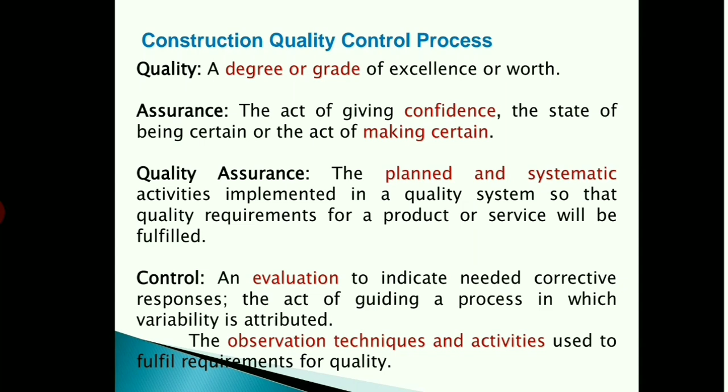Who will be responsible for quality control and who will be responsible for quality assurance? In construction activities, for quality control a contractor is very important. Usually the contractor is responsible for quality control, making sure that the standards are met for production, whatever activities are going on at the construction site.

What about quality assurance? Usually the government or an outside third party is responsible for performing quality assurance. For quality assurance, government or any outside third party is responsible.

In quality assurance, there is spot checking of contract compliance and test results, ultimately making sure the quality control process is working or not. So, quality control - contractor is responsible. Quality assurance - government or third party involved in the construction activities is responsible.

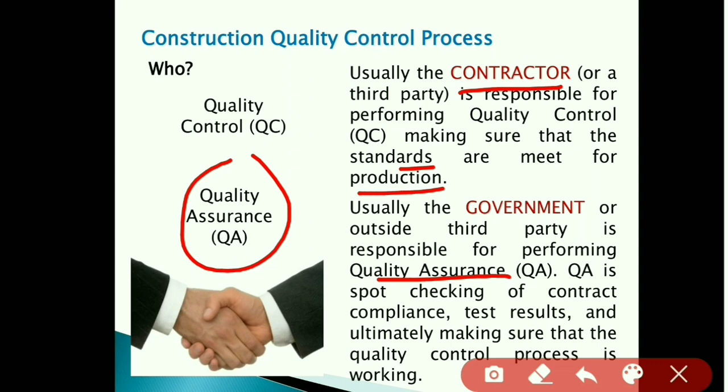How to achieve quality assurance? Government organizations or clients like BSB, MOWHS, these government organizations or any executing agencies will have very clear guidance on what is required per contract.

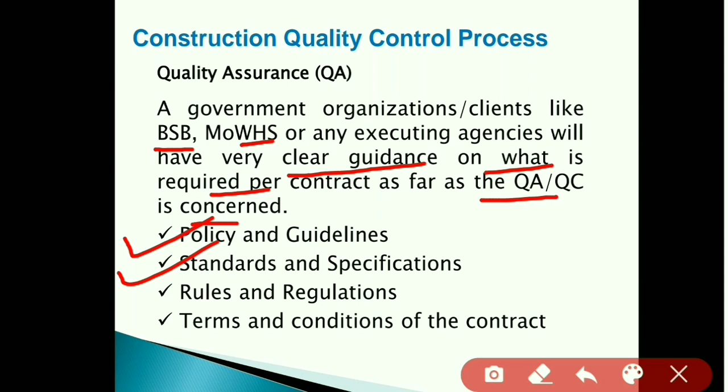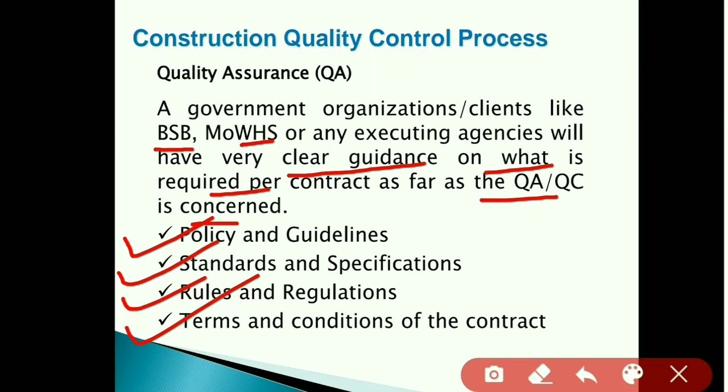It includes policy and guidelines, standards and specifications of works, rules and regulations on how to achieve that particular quality assurance, and the terms and conditions of the contract. Contract is very important in achieving quality assurance and quality control in construction activities.

Whose responsibility is it to achieve quality assurance? It involves regular but random testing of materials. In any construction activity, it is very important to test the materials and workmanship - those who work on site to complete the construction activity - tested at time-based or work-based intervals.

What will happen by doing this? It will help prevent, identify and correct quality related problems. Using these terms we can get preventive activities, identify whatever errors are there, and correct quality related problems.

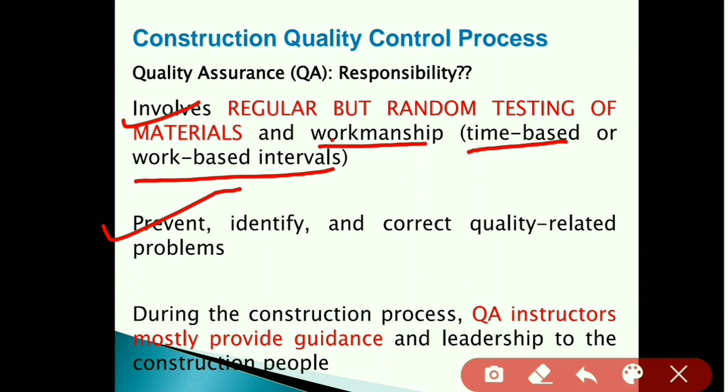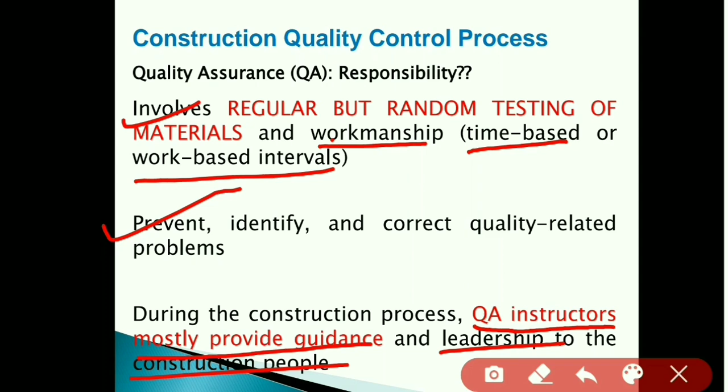During the construction process, quality assurance instructors mostly provide guidance and leadership to the construction people involved in the construction activities. This is very important.

What about quality control? The construction contract, made before construction, defines the quality standards and quality control testing requirements. This is achieved by making the contract between the third party and the owner, defining quality standards, specifications and quality control testing requirements.

In that case, the contractor must prepare a detailed quality control plan.

Who plays the role of control plan? The contractor. He must prepare a detailed quality control plan for each and every work, detailing how the quality standard will be achieved.

How to apply that quality control plan is depending upon the contractor. He should make a proper plan to achieve the quality.

Next, the quality control plan must be approved before the start of a particular work. Whatever work is going on, the quality control plan must be approved before that particular work. So approval of the plan is very important.

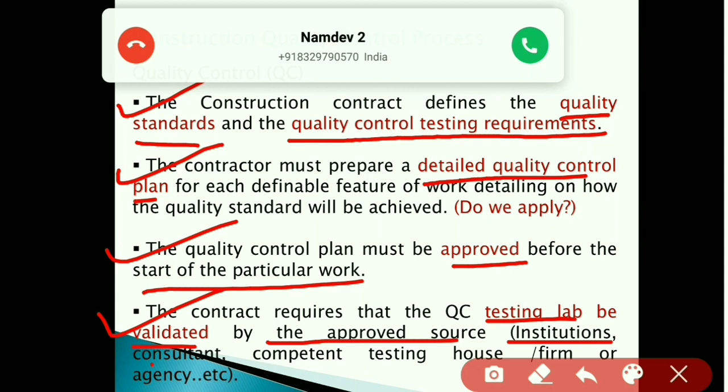It should be approved by an approved source. The quality testing lab should be validated by the approved source, that is institutions, consultants, a competent testing house, firm, or agency. It is very important.

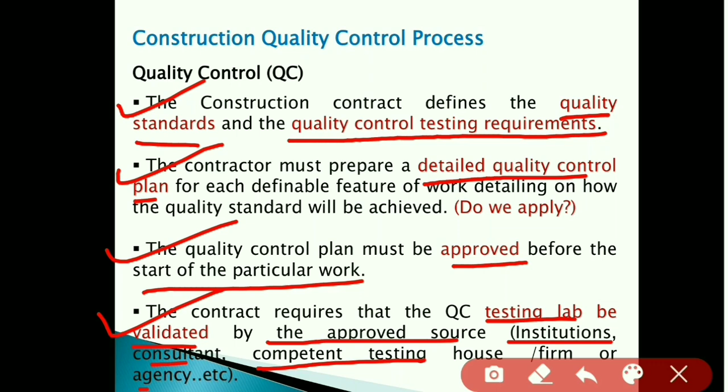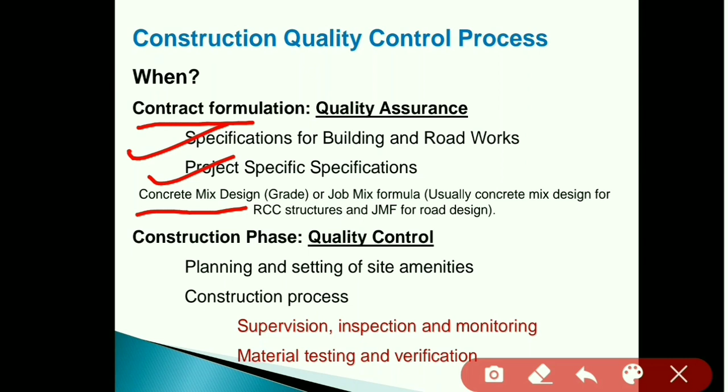Now, when should it be done? Contract formulation for quality assurance should include the specifications for building and road works, project specific specifications. Here, concrete mix design means what is the mixing formula. Usually concrete mix design is useful for RCC structures, and JMF for road design. It is very important in contract formulation for quality assurance.

Next, the construction phase should achieve quality control. Planning is one of the first phases, setting of site amenities, and then the construction process, which involves supervision, inspection and monitoring, material testing and verification. For this purpose, quality control is achieved by supervision, inspection and monitoring, material testing and verification.

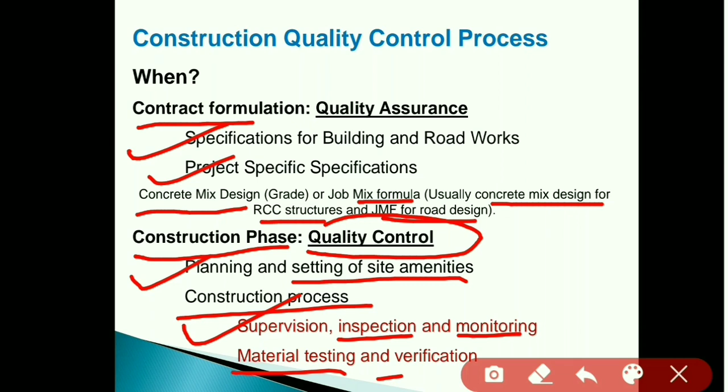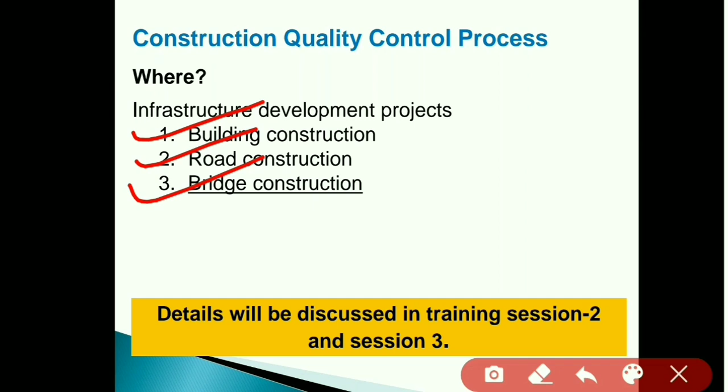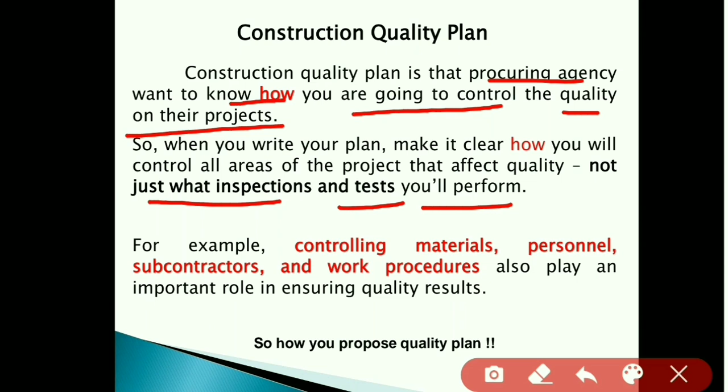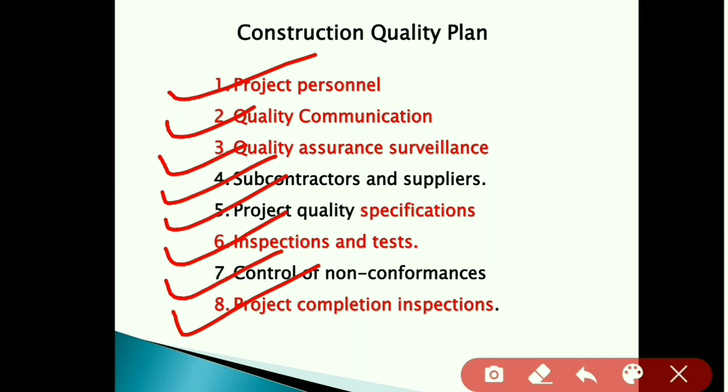Next, construction quality plan includes the project personnel, quality communication, quality assurance surveillance, subcontractors and suppliers for project quality specifications, inspections and tests, control of non-conformances, and project completion inspections. These are the various variables included in the quality plan.

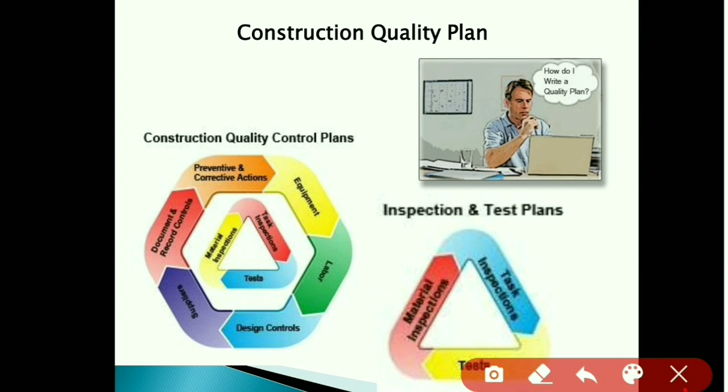So for inspection and test, these terms are important: first is material inspection, then task inspection. These two terms are very important.

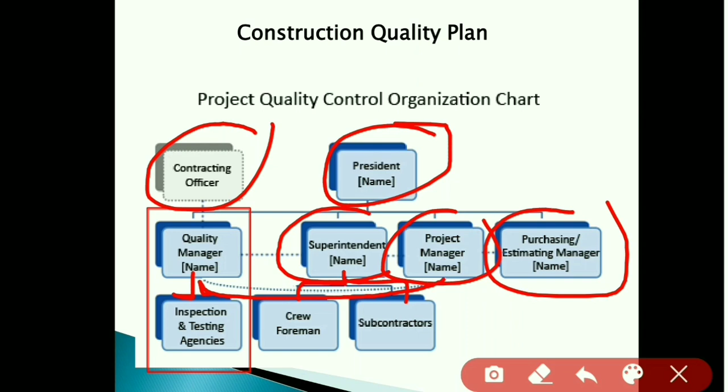Then the construction quality plan includes this structure: first the president, then superintendent, project manager, and this project manager is connected to the quality manager. The quality manager does inspection and testing with agencies. Then again, superintendent is for crew foreman, subcontractors, and another is the purchasing or estimating manager department. These are all connecting to the contracting officer. This is the project quality control organization chart.

Now, this is the inspection and test plans. It includes contract number, project name, contractor. This is the example sheet.

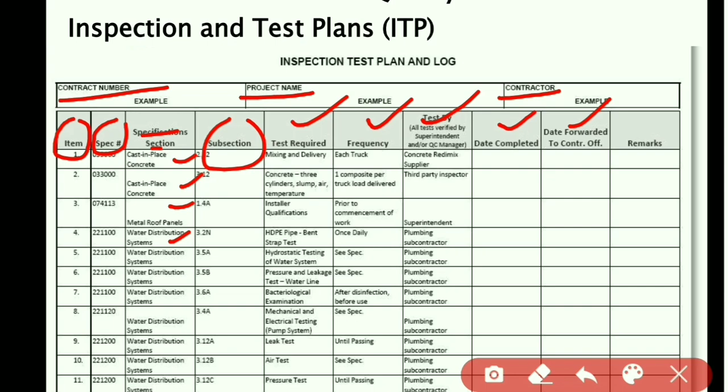First is the item number, then specific code, specifications of that particular section. You can see cast in place concrete, metal roof panels, water distribution, one by one, then subsection, then test - which test is required, frequency, tested by whom, date completed, date forwarded, and final remark. This is the inspection, test plan and log.

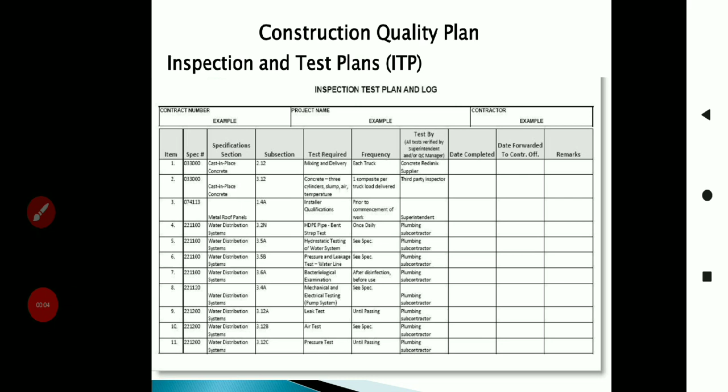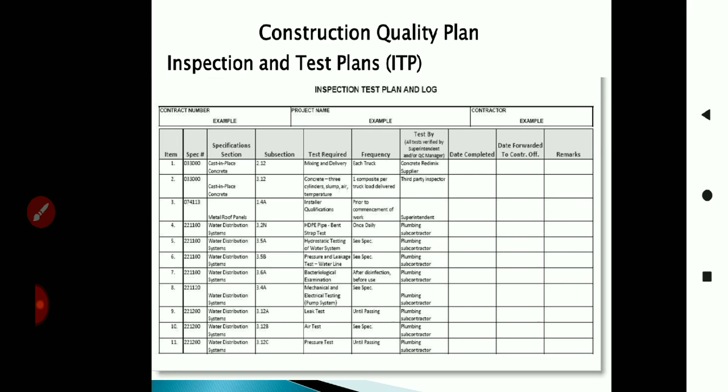So this is something about quality assurance, quality control, and construction quality plan. In the next video lecture we will learn about what problems arise during the construction activity and what can be done in detail. Let's see in the next video lecture.